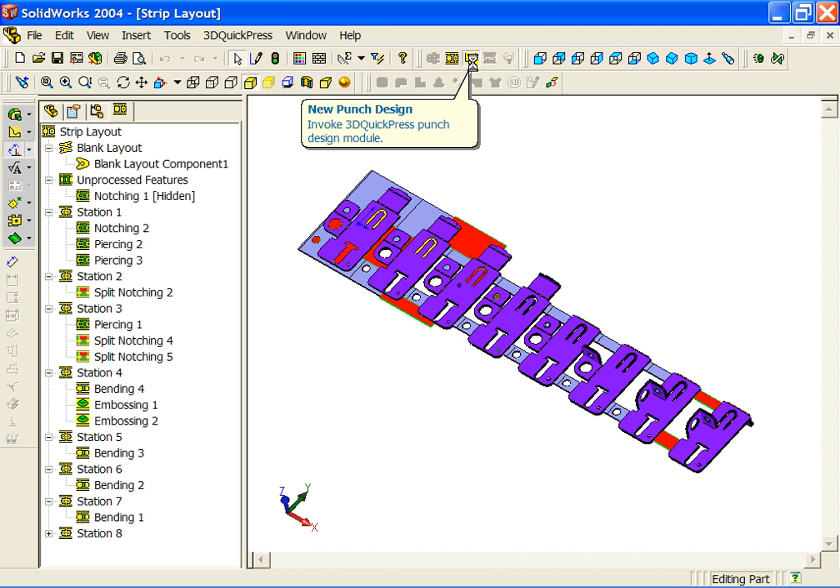Stage 3 brings us to punch design. The first thing it's going to set up is our die set structure. So we step through a wizard. There are 3 steps to the wizard, different types of configurations, and of course user defined settings.

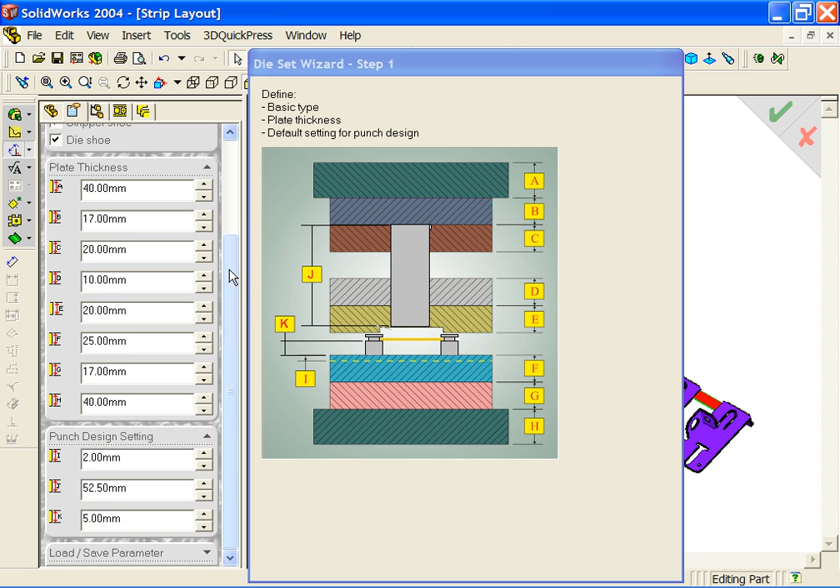So down below here you'll see a load and save parameters. We can adjust our different plate sizes, turn them on and off as needed. Now we can set our width of our inner and outer plates. We can set the plate center, and finally we can set our clearance for all the different notching and piercings, our land, our taper, and once again we can save the parameters for reuse.

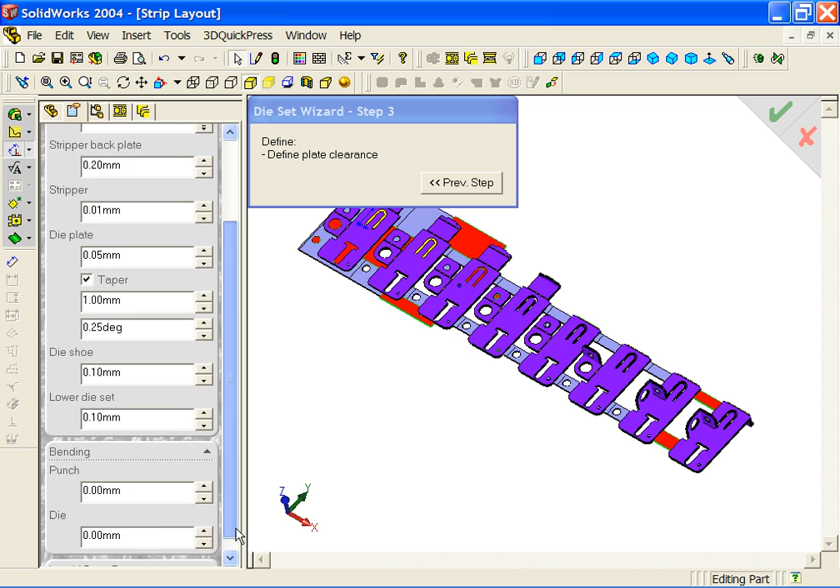Now you'll see that there are placeholders for each one of the different features that we've created thus far. So the split notches, the notchings, the piercings, and so on. These are just placeholders for the time being.

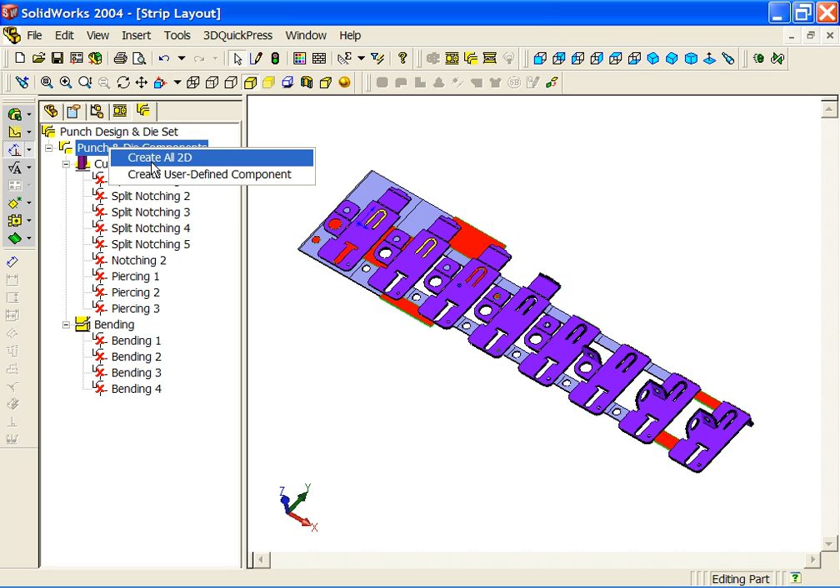We're going to start out with an option to create just the 2D. This gives us the flexibility to create the two-dimensional sketches at the right planes, but allow us to modify the sketches before the 3D is created. It's strictly an option for the user. You may be more comfortable working in the 2D at this mode, and then what we can do is show and create the 3D.

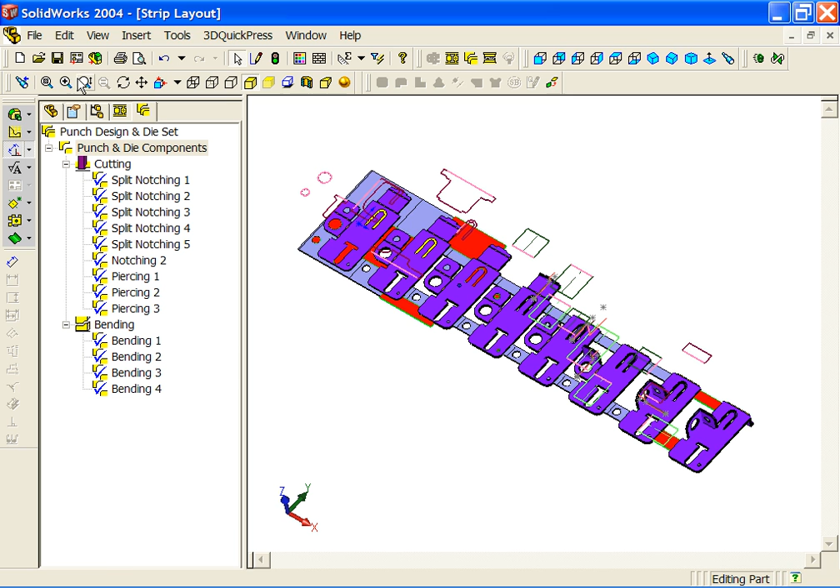In this case I also have a setting on for shoulder locks. This is an option, and of course if I zoom up you'll see a better idea what's going on there. We can also create user-defined punches, such as our dimple feature here. We might want to create something unique in that area.

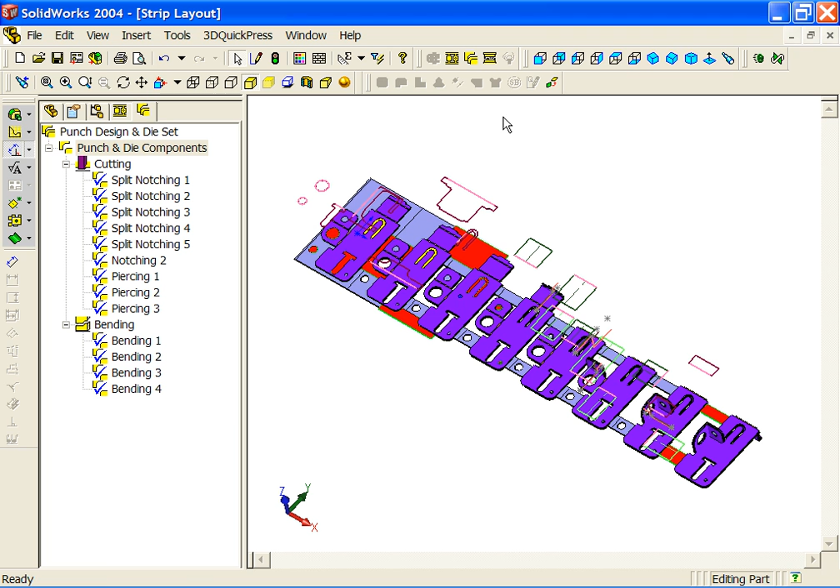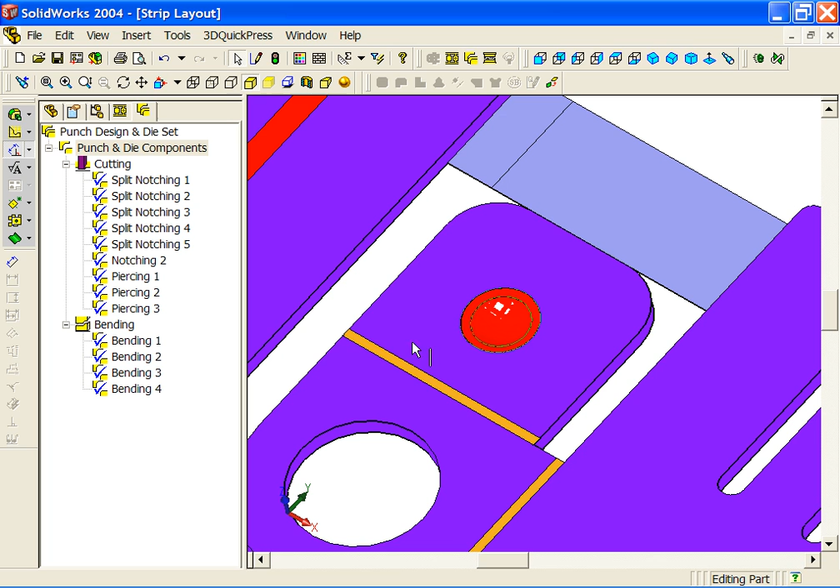So to get started with, we can zoom up on that and take those faces that are going to create the form and actually utilize those for extruding up to. So in more complex forms, this would be the simplest example. You can quickly leverage the information right off the strip. Once we've created that, we can draw the profile of our punch. So I'm going to go to the feature manager and start a sketch.

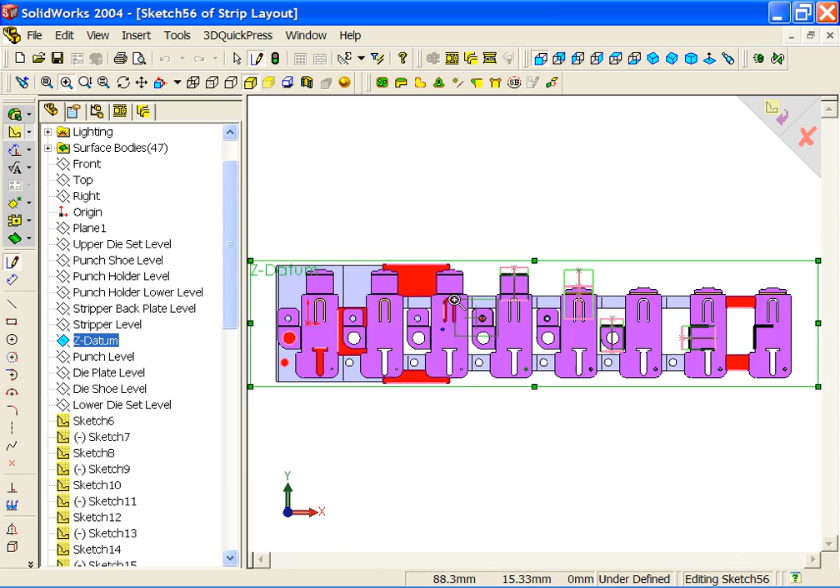This way we can utilize SolidWorks sketching tools, and in this case it's going to be a simple circle. So let's just zoom up around this feature and find the center there. Dimension that, say at 6, and just close that up.

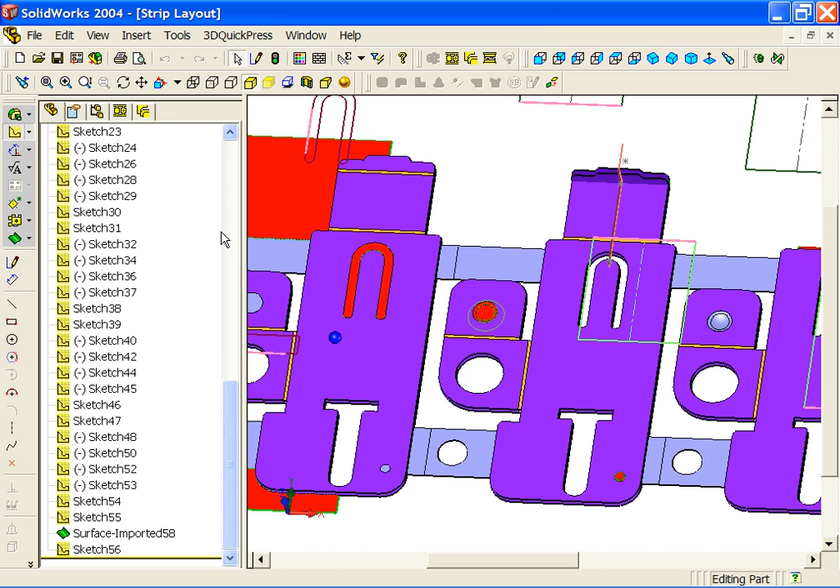Going back to this view, we can now go back to punches and create a user-defined punch. The profile is the sketch I just created, and then what are the surfaces. So I'm going to pick that surface from the feature tree. It's a flyout tree, gives me the ability to do that, and then pick OK.

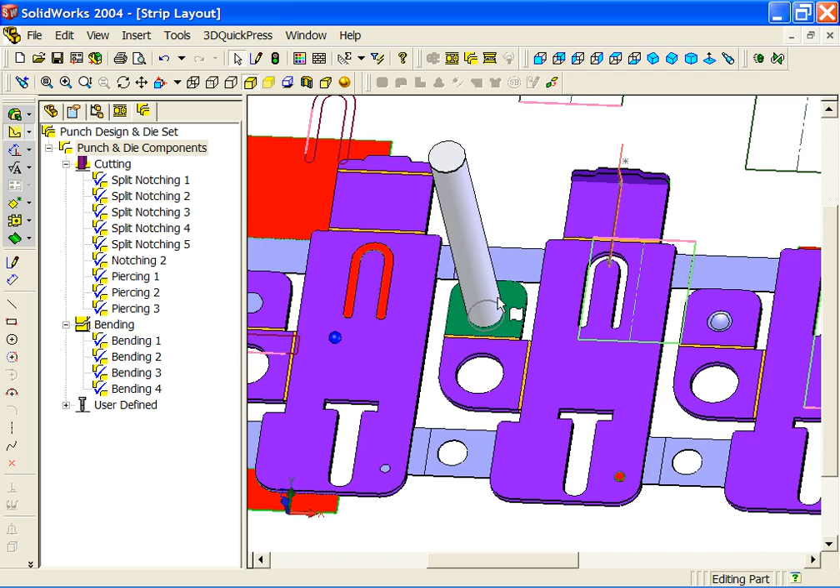Now that we have that created, we could go through the same process for creating the bottom, and instead of going through that, let's just show some of the tools that we have to control the project info. Because now that we've created the punches, we can go in here and set up the project info so you can set your different codes for each of these different objects that are going to be created in the assembly. So whatever you use in your shop, you can put in the prefixes and so on, and it's going to organize it very nicely for you.

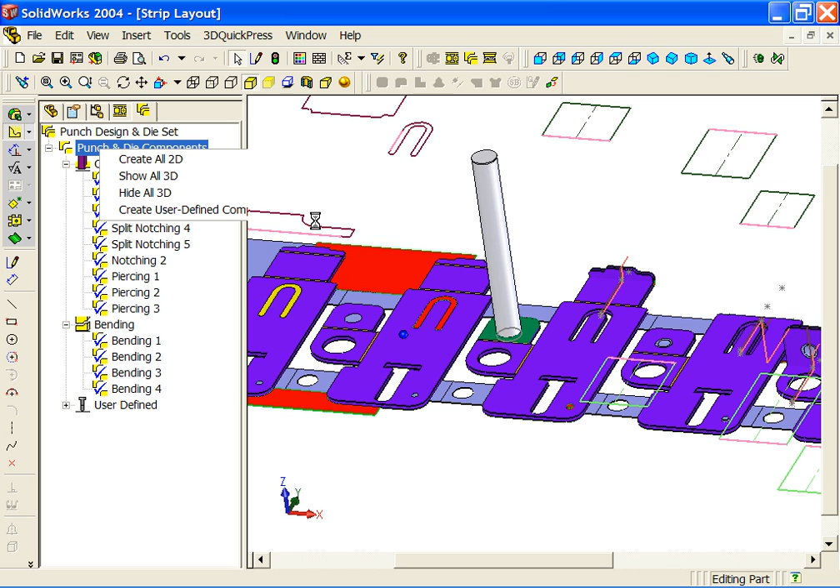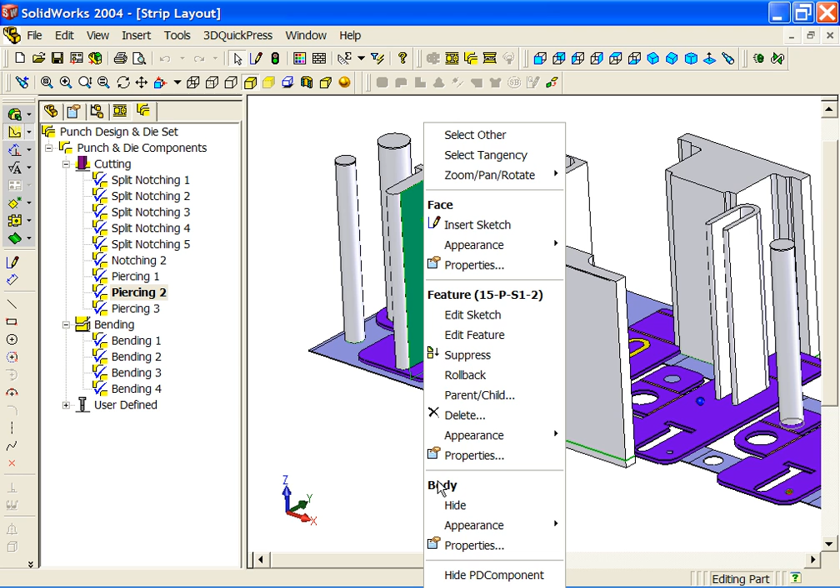Let's show the rest of the 3D. And it gives you the baseline that you can work from now very quickly. And you notice that we're still working in a part, what we call a multi-body part. So it's very easy to manipulate and move around. Each one of these can still be modified. The different parameters will depend on what you'd select. And our bends and so on can be modified.

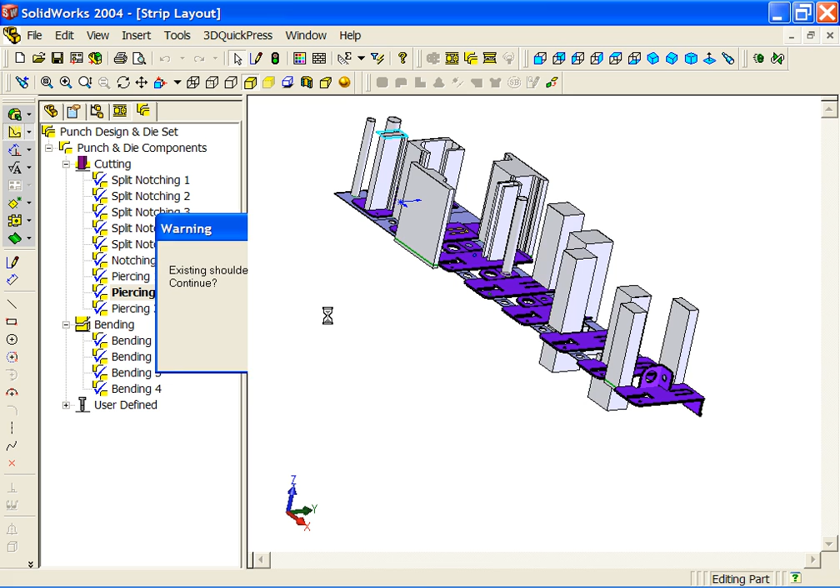Our cross sections, we can split this block into different configurations. And each one of these has the ability to turn on and off the shoulder, edit the shoulder, add a step. If we wanted to add a step to it, it will remove the shoulder, and it wants to know what the step is. You can modify the step. So as you can see, it's putting a default step in there. And then when we're happy with that, just tell it what size step it is. Just take the default in this case, and we have our step punch.

We can also hide the 3D very quickly to go back and work on specific areas. As we get into the bending, we can also control the holding level. We can edit the shape, the cross section of the bend, add our spring back calculations, and so on. Same with the die side. So at this stage we can convert now and step into the die set.